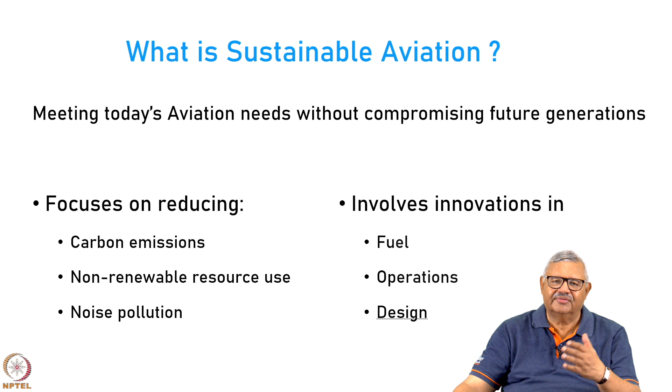Today we are going to look at sustainable aviation by design or usage of a new type of aircraft, and that is aircraft based on the principle of buoyancy.

So what is buoyancy engineering? Buoyancy engineering represents creative problem solving by exploiting buoyancy for lift generation. Traditionally, we generate lift by ensuring a minimum relative velocity between the flying object and the ambient air. But for that, you have to use a propulsive device to move this aircraft at a certain minimum speed. But what if we can use buoyancy as a mechanism to overcome gravity?

Then you do not have to fly at any speed, even at zero speed or stationary you will be able to get lift. So buoyancy engineering basically means application of Archimedes' principle, which acts on either a partially or fully submerged body. It says that the upward force acting on any body which is partially or fully submerged is equal to the weight of the fluid displaced, and it is also applicable for a fluid inside a fluid, not necessarily only a solid body in a fluid.

Now, there are many applications of buoyancy engineering. One of them is hot air balloons, where we enclose the envelope of the balloon with hot air generated by using some burners on the bottom, and hot air has a density lower than the ambient cold air, and therefore you start getting buoyancy.

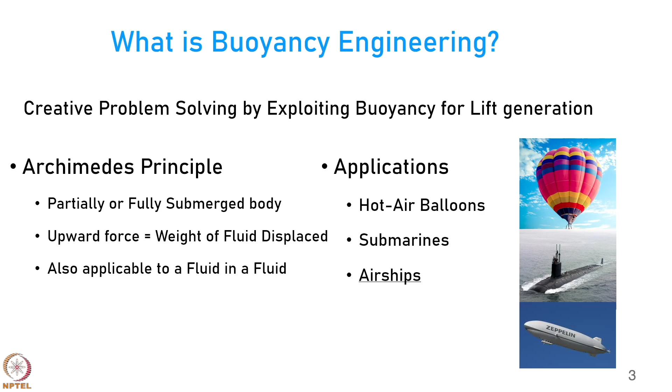Then you also have submarines which work on the principle of buoyancy to come up to the surface and to go down below the surface, so that they are less detectable. The third application of buoyancy engineering is airships, which are aircraft that are operating, and today we will talk about airships.

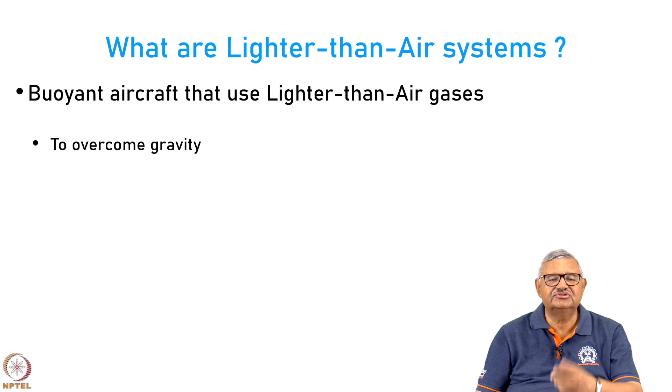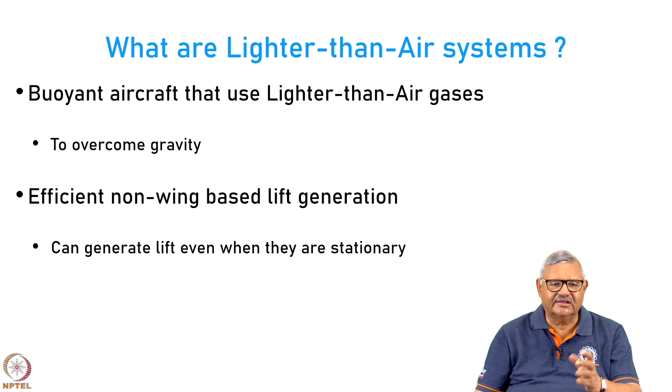Airships belong to a family of systems called lighter than air systems, or in short we call them LTA systems. So what are lighter than air systems? Basically these are buoyant aircraft or systems that use any lighter than air gas, or any gas whose density is less than that of air, and the purpose is to overcome gravity without the need for relative motion. These are very efficient non-wing based lift generation techniques because they can generate lift even when they are stationary. There are three most common types of LTA systems, and then there are many hybrids of these types: hot air balloons, aerostats and airships.

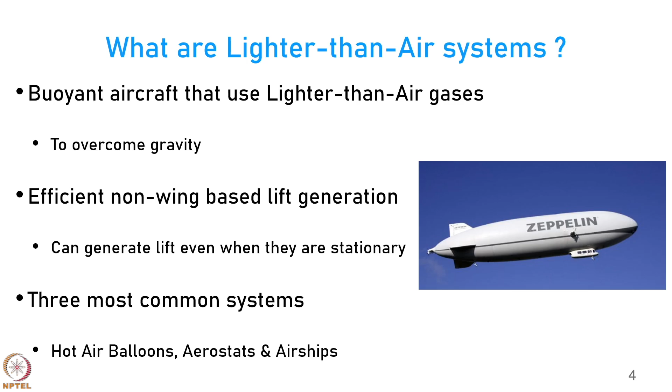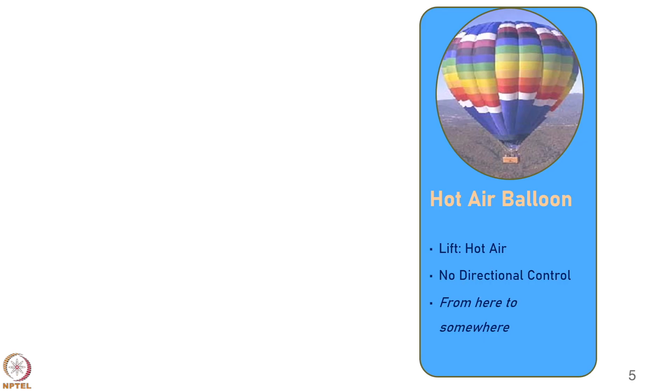Hot air balloons, as I mentioned, are platforms which take you from here to somewhere depending on the wind direction. They do not have any directional control. They just use hot air to generate lift and overcome gravity.

Aerostats are platforms again, but they are unpowered. They only have on their rear some stabilizing surfaces which allow them to not move too much with changes in wind direction, and they are unpowered, so they cannot go anywhere. They are connected with a cable to the ground and tethered.

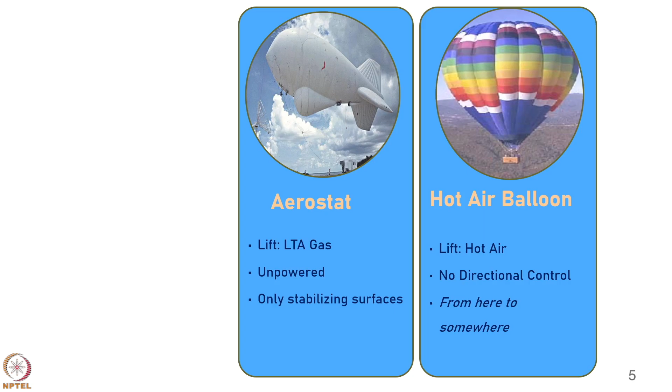Then you have airships, which are like an aircraft. They have 3-axis directional control. They are powered, and to some extent using the power of the power plant, they are able to overcome the winds and fly in the air.

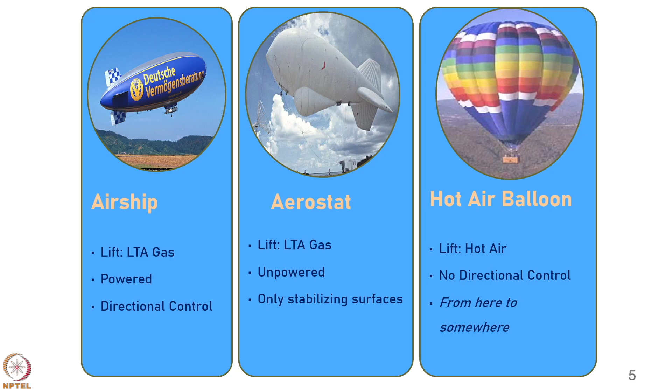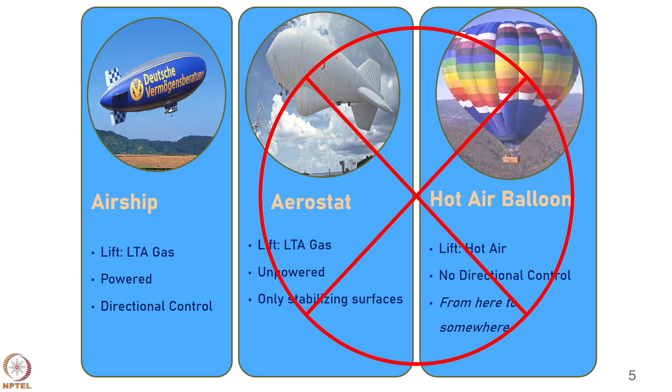Today we will not discuss aerostats and hot air balloons because they are not relevant to our discussion. They cannot be used for transportation from a desired location to another. Balloons go wherever the wind takes them, and aerostats cannot go anywhere. Airships can definitely travel from point A to point B to a large extent.

Now let us do a brief comparison between the two families of systems, the lighter than air on the left hand side and the heavier than air on the right hand side. Let us first look at the heavier than air system because they are very popular, people know about them.

They have two fundamentally good features: they are fast and they are less susceptible to weather changes. But there are also many negatives of heavier than air systems. Primarily they require a certain minimum relative speed to fly to generate lift, otherwise they will fall.

They are very much inefficient as far as fuel is concerned. The whole world is grappling with the consumption of fossil fuels to support current aviation, and they are complex. Anyone who has made an aircraft will realize these are not simple to make, they are very, very complex.

On the other hand, the lighter than air systems not only have dynamic lift when they move because of the relative motion between them and the ambient air, but when they are stationary they also generate lift because of buoyancy, called the aerostatic lift.

They are highly fuel efficient. The amount of fuel they consume is a fraction of what is consumed by a heavier than air system, and in general they are less complex to operate, but they have two main fundamental flaws. One is that they are slow, and the other is that they are very much susceptible to weather changes. Because of these two major drawbacks, the three positives are overcome and you do not see them very often.

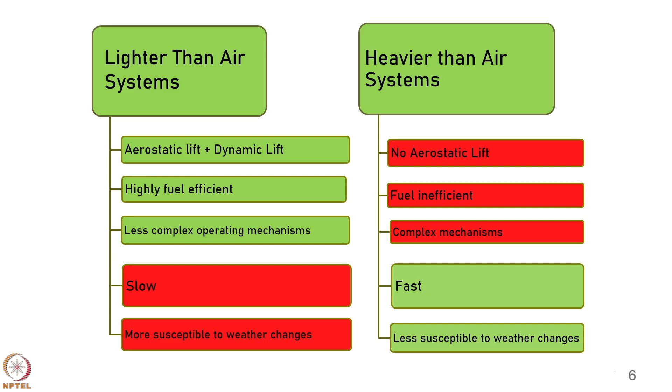They are not yet very popular, they are a niche area of application, but they are slowly emerging as alternatives to heavier than air systems for certain transportation requirements, and that is what we will study today.

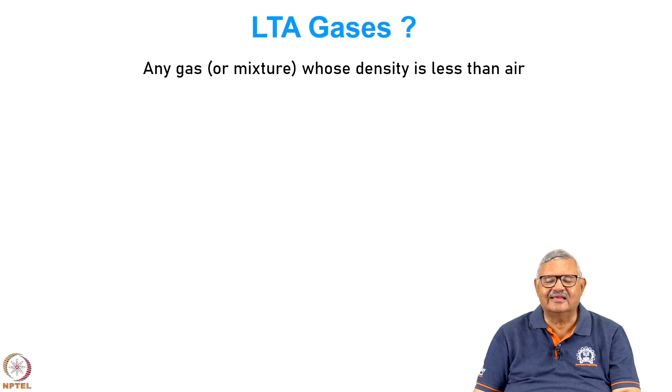Now, the LTA systems are based on LTA gases. So what are LTA gases? If I ask anybody, they will immediately say any gas or mixture of gases whose net density is less than that of the ambient air can be called an LTA gas.

The two principal gases everybody knows are hydrogen and helium, which under normal temperature and pressure conditions provide a lifting capacity of approximately 1.1 and 1 kg per cubic meter. This means if you take a balloon of hydrogen weighing, say, 135 grams, and put in it 1 cubic meter of hydrogen, because the self weight is 135 grams, the net lift you get will be 1 kilogram. Similarly, helium will give you slightly less lift, around 7% less compared to hydrogen.

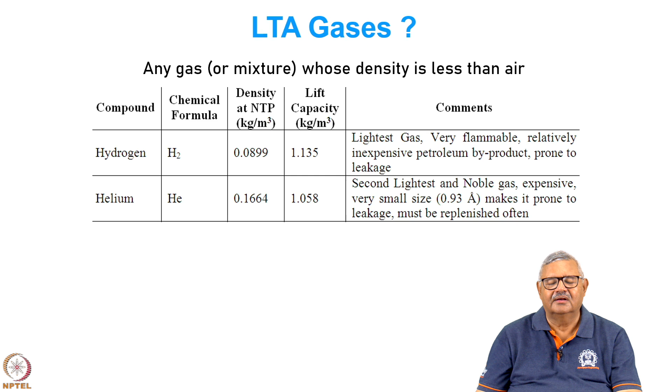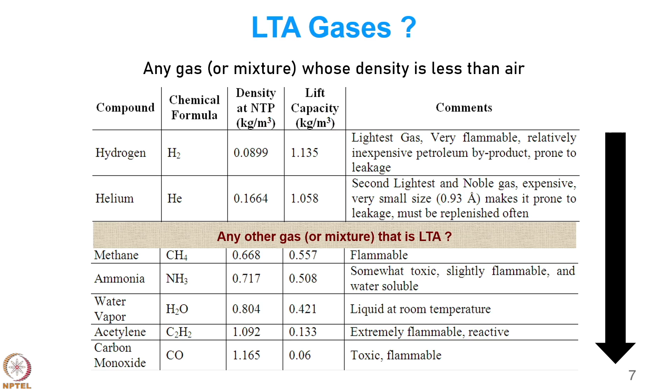However, there are many other gases also which are LTA: methane, ammonia, water vapor, acetylene, carbon monoxide—all of them are lighter than air. But the problem is the lifting capacity reduces drastically as you go down this list. The best is hydrogen with 1.135 kg per cubic meter, and the least capable in this list is carbon monoxide, which is only 0.06 kg per cubic meter, meaning you will get only 60 grams of lift per cubic meter of carbon monoxide. Therefore, it is practically of no great use to us.

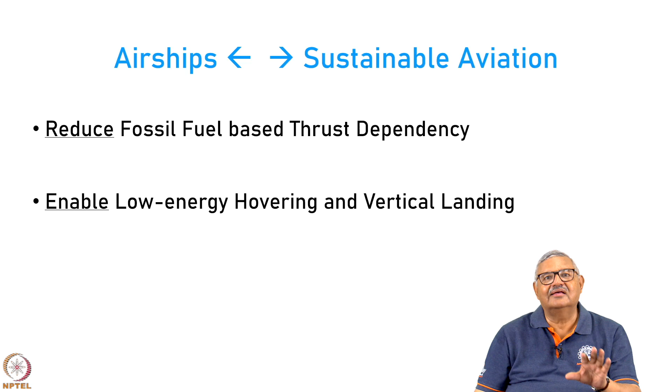Let us have a look at how airships can give you sustainable aviation. Airships reduce fossil fuel based thrust dependency by using buoyancy for generating the major part of their lift. They enable very low energy hovering and vertical landing, which is not possible with many heavier than air systems unless they consume large amounts of fuel, like helicopters or aircraft with vertical takeoff and landing, which can operate vertically and hover but consume massive amounts of fuel in that process.

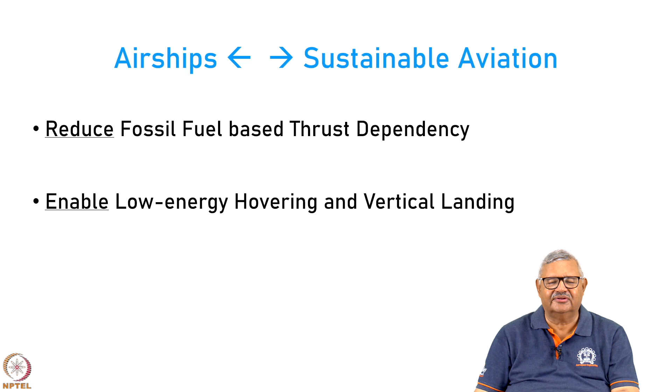Airships can do the same thing with much lower energy requirements, and they are quiet because their engines are smaller. Since fuel consumption is also much lower, they also have low emissions.

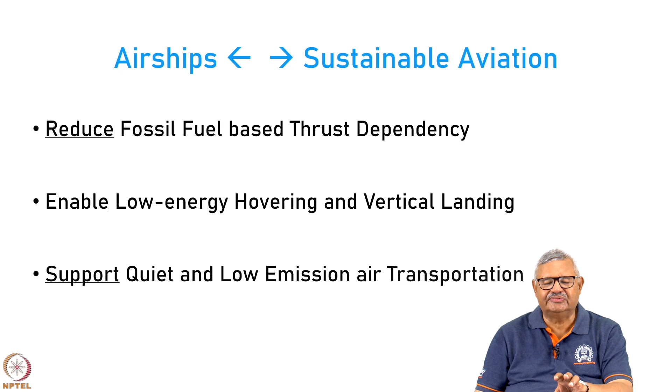Both on the emission front and on the noise front, airships score over aircraft, and therefore they are very powerful candidates for sustainable aviation.

As far as transportation of passengers, we are not looking at airships as a means for transporting passengers on a regular basis from A to B, because the dispatch reliability is very low, primarily because of the susceptibility to weather conditions and very large size and slow speed. But if you look at cargo transportation, it opens up a new opportunity.

Today cargo can be transported either by a ship or by a train or by a truck or by an airplane. These are the four ways of transporting cargo, especially over long distances, intercontinental distances or large distances.

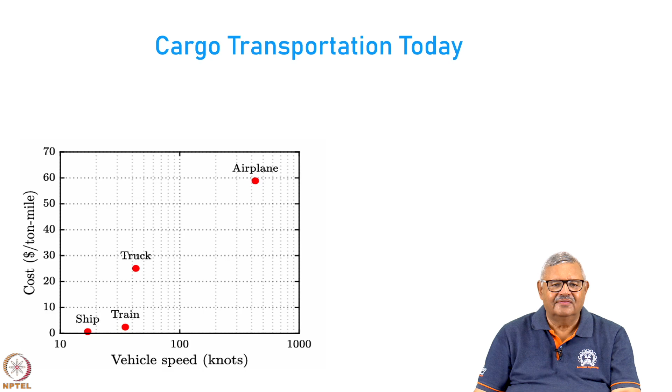This gap is where airships fit in. They push themselves into the gap that you can see here.

So let us say you would like to have more buoyant lift. One way is to increase the volume of the envelope of the airship. With increased volume, you also have a problem of increased weight because there will be more material used. So there is a limit to how much benefit you will get.

The other option is that you reduce the density of the gas or gas mixture inside. Now, if you use hydrogen, then you do not have any further scope of improvement with any naturally occurring gases, so you have reached the limit of the least dense gas. The other option is rho A, the density of the air outside, which can be increased if possible.

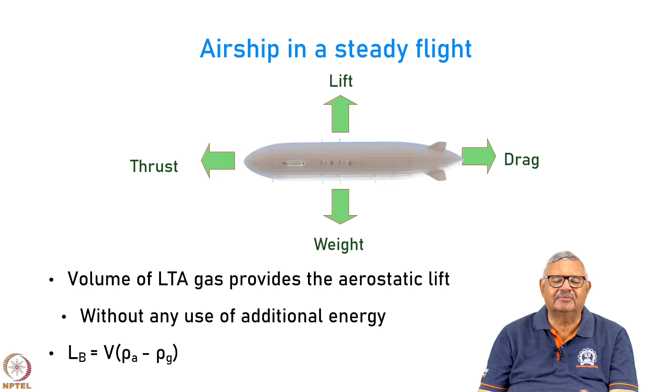How do you increase the value of rho A? One way is you fly at lower altitudes, because at lower altitudes the density of air is more than at high altitudes, and also fly in cold weather, because cold air is heavier than hot air. So if you fly at low altitudes in winter, you will get the maximum possible lift from a fixed volume and a fixed LTA gas.

So these are the only three things available to you to increase the buoyant lift of an LTA system.

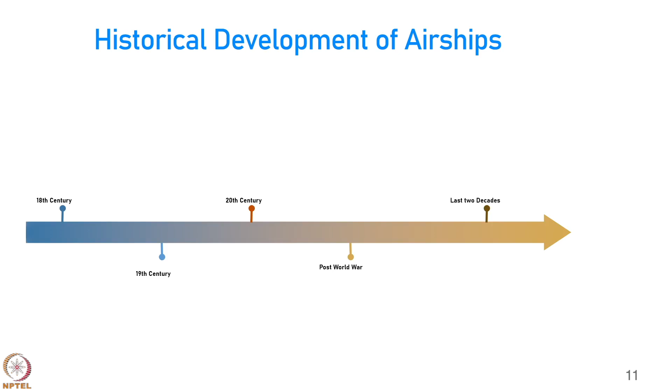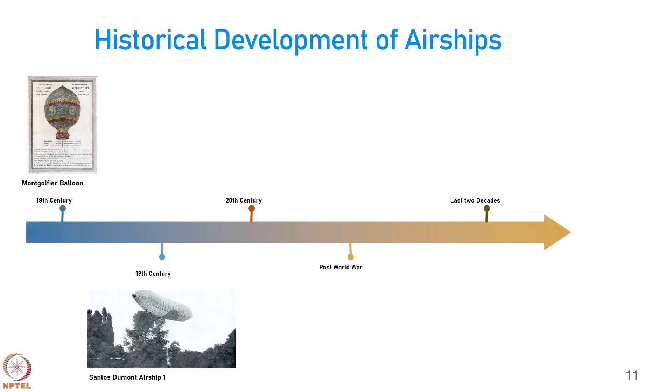Historically airships were ahead of aircraft. If we trace their development from the 18th century till the last two decades and the current times, you will notice that several years before the Wright brothers, the Montgolfier balloon established that LTA systems can be used. In the 19th century, when the Wright brothers were struggling to make their aircraft really operational, there were people like Santos Dumont from Brazil who were flying airships regularly.

Then during the 20th century, there was a huge amount of development in the airship technology, but aircraft technology was slowly catching up. Then because of a series of accidents that took place in the late 30s, early 40s, the airship technology was into hibernation till it was revived in the post-war period by some interesting projects, and the outcome of that project eventually was a blimp.

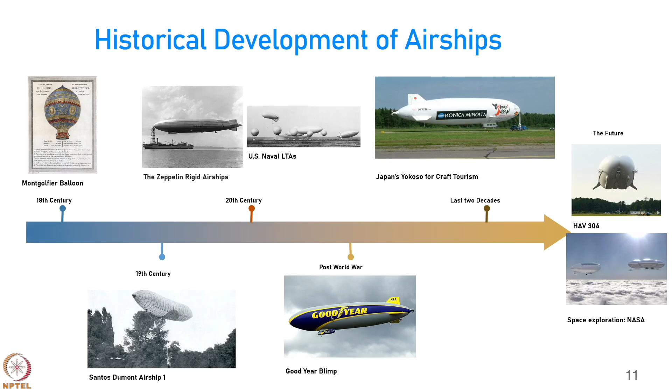In the last 2 decades there have been lots of developments, and recently there have been attempts to use airships for exploration of other planets like Venus. There are proposals to look at hybrid airships, which have some additional interesting features. So the whole landscape has now emerged. After about mid-80s to 90s, interest in airships is being revived, and in the last 10 years there has been tremendous interest, as we will see.

Like an aircraft, an airship has similar components. There is a gondola where you put all the payload and the items. In this case, we also put the propulsion system on the gondola. You have this large envelope in which you put the LTA gas, and then you have control surfaces.

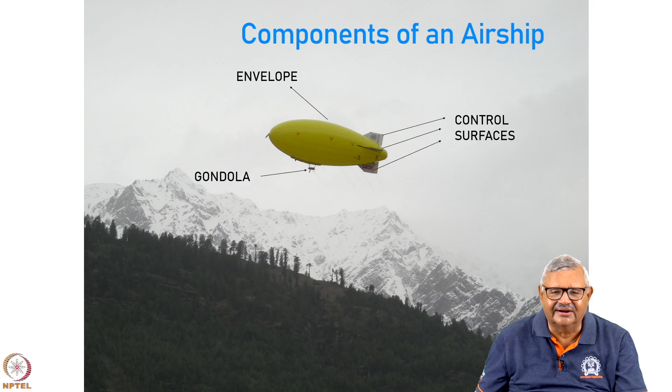The main difference, as you can observe, is that the gondola, which is equivalent to the fuselage of an aircraft, is much smaller in dimension compared to the lift producing device, which is the wing in the aircraft and the envelope in the airship. Also notice that you have more area of control surfaces in airships compared to aircraft. For example, aircraft normally have only one vertical fin, but here you can normally see 2 vertical fins. That is because airships fly at low speeds, so they need large areas to provide the yawing moment to balance out the instability in yaw.

There are 4 types of airships based on the structure used to construct them. On the top left is the rigid airship, which was used in the past and is coming back in a big way today in the future of large size cargo airships. On the bottom you have a non-rigid airship which has got no internal structure.

It only has an envelope which maintains its shape by internal overpressure. Then you have a compromise solution called semi-rigid, where there is an internal rigid structure like you have in the aircraft - these frames and longerons - but the envelope is flexible. That is called semi-rigid.

One of the most successful airships flying today is Zeppelin NT, which is a semi-rigid construction. The bottom right is a hot air balloon which is masquerading as an airship. It is a hot air balloon in the shape of an airship, but it can't be used for any serious work except promoting products like KitKat or flying around for personal adventure. It cannot really be used for anything very serious or for transportation purposes.

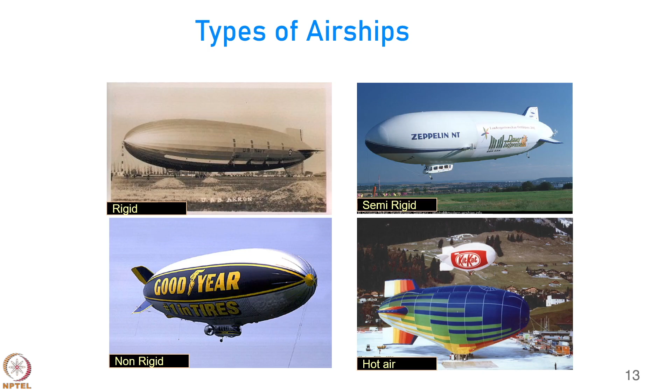Now, what is the unique selling proposition or USP of airships? Why are we talking about them? First of all, they are able to operate from open fields. They do not require a dedicated runway or an airport. So that makes them available to operate from remote areas.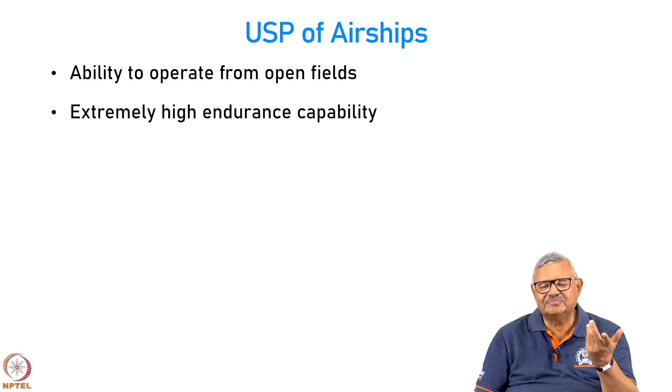They have extremely high endurance capability compared to aircraft, because they use much lesser fuel. Whereas an aircraft can fly up to a maximum of 18-20 hours non-stop without refueling, airships can fly for much longer. 50 hours has been recorded, 52 hours has been recorded quite routinely on airships.

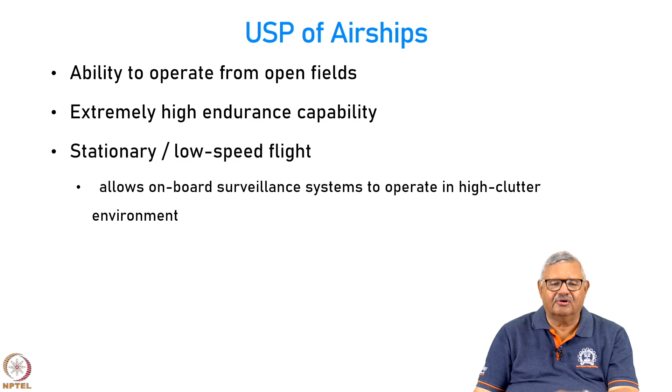Airships allow stationary and low speed flight, and because of that you can have onboard surveillance systems to operate in high clutter environments. They will also give you large cabin space and low vibrations, which reduces crew fatigue as compared to aircraft.

The large cabin space is available because you already have a large envelope, so you can put a large cabin below it. This is a vehicle that gives you low noise, low environmental pollution, and it can be made unobtrusive by camouflaging it with the background.

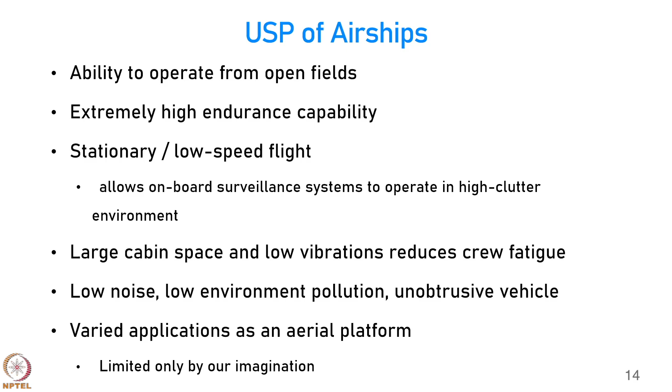There are many applications of airships as an aerial platform, and we always say that the applications of airships are limited by your imagination. There are many uses. Let us have a look at some current applications of airships.

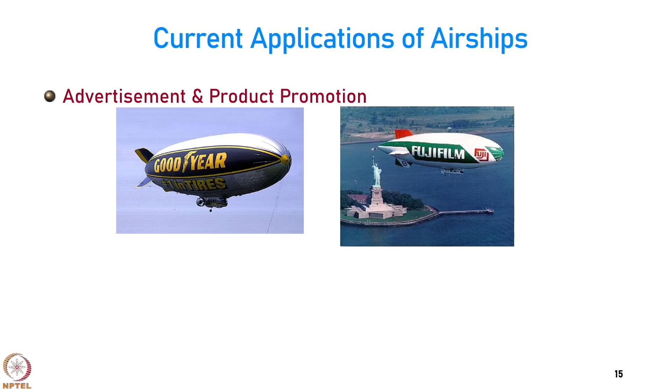The most common application of airships in the world today is for these two activities: product promotion and advertisement. Then there are obvious applications in aerial observation and surveillance. Many applications, especially the Zeppelin NT airship of Germany, are used for tourism and corporate hospitality.

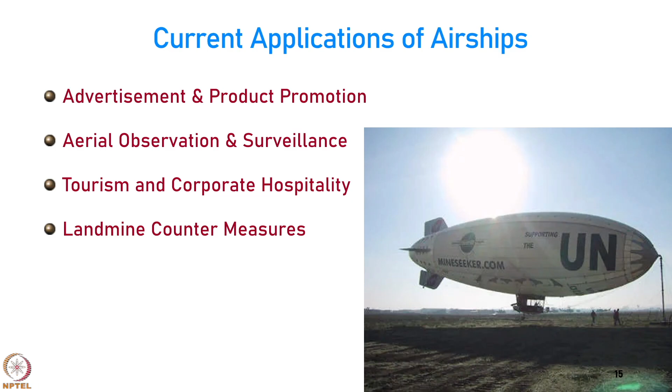Then there are some very innovative applications, such as the use of airships for removing landmines - an airship funded by the UN called the Mine Seeker. I would encourage you to go and search the website mineseeker.com to have a look at what was done to take care of the landmines left after the Kosovo conflict. There is also a recorded application of airships for several law enforcement purposes, such as during the Olympics in Athens and the Olympics in Atlanta.

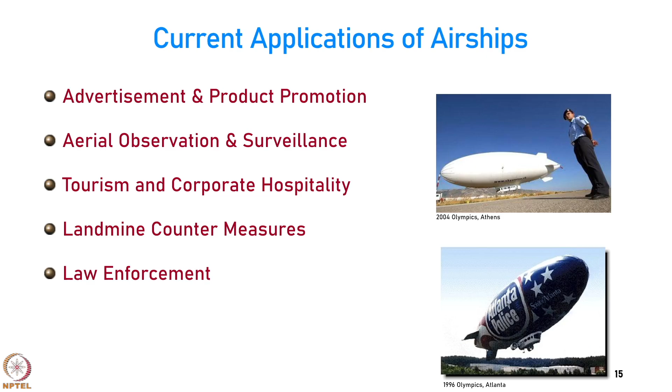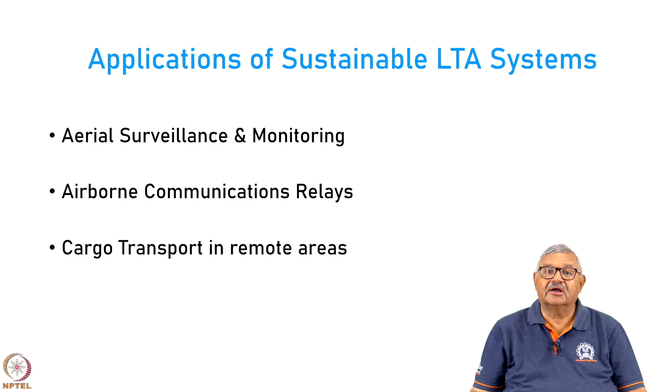Now we will look at sustainable LTA systems and how they can be applied. We can use them for surveillance and monitoring, as airborne communications relay to provide communication links in areas which are not connected, for cargo transport in remote areas (the principal application for sustainable aviation in the future), and also for tourism and short haul passenger travel.

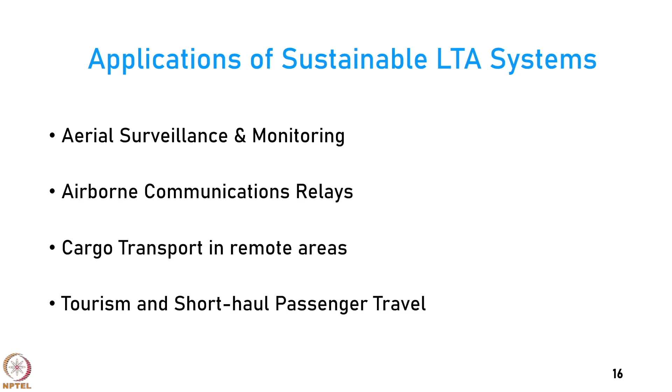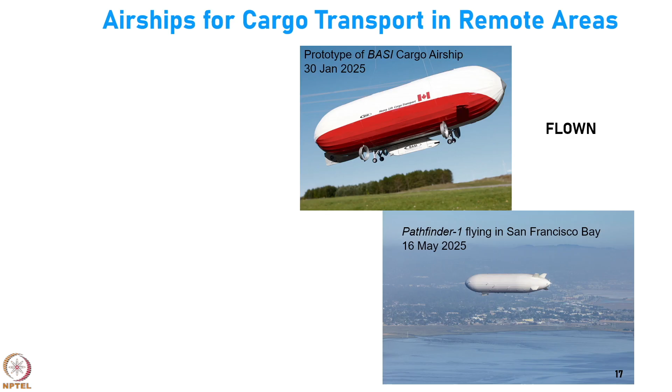If you look at airships for cargo transport in remote areas, these are two prototypes which have successfully flown: the Basi cargo airship prototype, flown in Canada, and the Pathfinder 1, flown in San Francisco Bay. Both of these are only working prototypes.

Then there are certain concepts under development, such as the Flying Whales shown at the bottom, and the Atlant concept of Atlas LTA shown at the top left. These are under development and we will hopefully see them flying very soon.

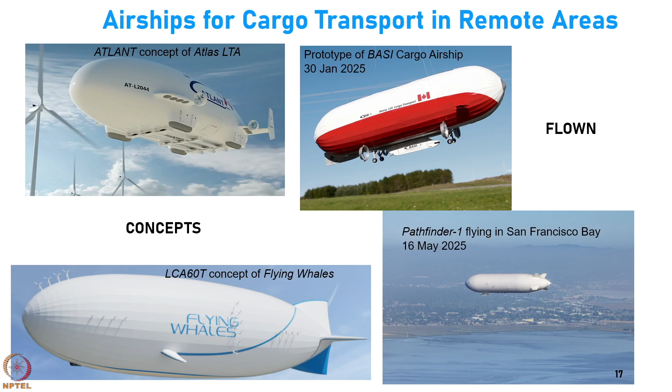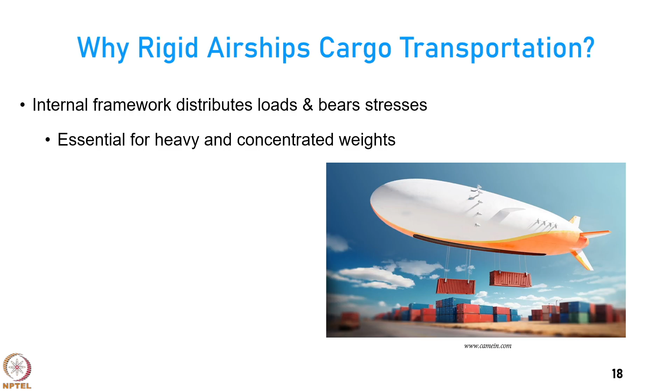When we look at cargo transportation, large volumes of cargo transportation, rigid airships become a very promising category. Why rigid airships? Because they have the internal framework to distribute loads and bear the stresses which are inevitable when you transport large, heavy, concentrated weight of cargo, such as shown in this image.

Rigid airships also have better resistance to the weather, which is a problem that many semi-rigid and non-rigid airships face. And if you have to transport cargo over long distances, you will need better weather resistance.

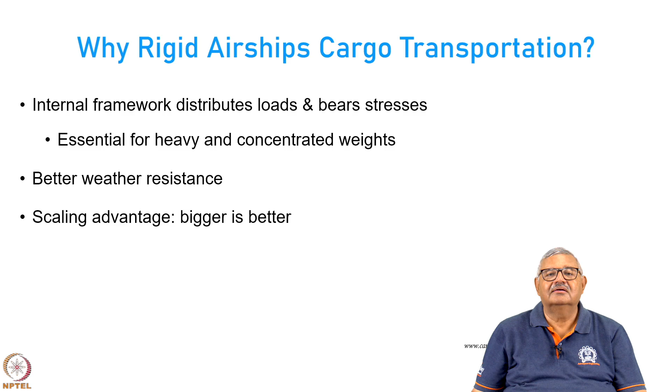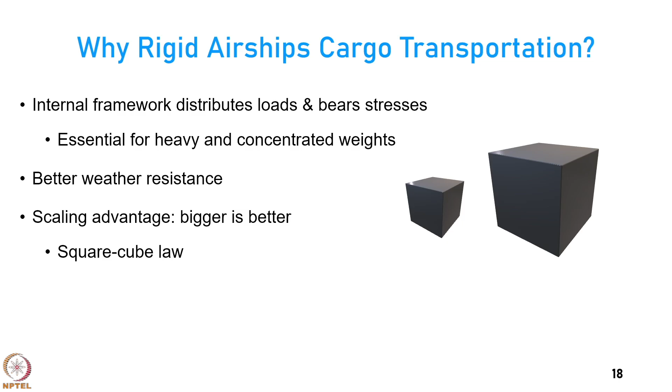They also have a scaling advantage. Using the square cube law, the moment you make them larger, they become much more productive and efficient. As we know, when you increase the linear dimension, the area goes up by square but the volume goes up by cube. The lift from a buoyant system is proportional to L cube, whereas the weight of the system is proportional to L square. So there is a straightaway advantage in scaling the airship—the lift to weight ratio increases when you make airships larger.

So when you want to transport huge cargo containers, larger airships are definitely much better. Also, the rigid airship will have lesser gas leakage, because the gas bags will be inside a solid structure, not exposed to the vagaries of the outside world. Plus, because of the rigid structure, you will have higher redundancy—the structure can bear more, and is much more efficient and redundant.

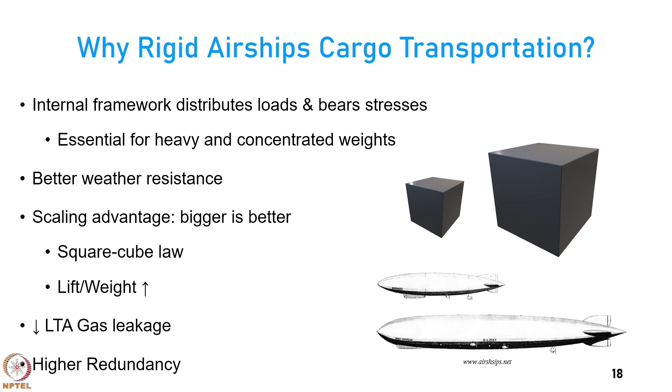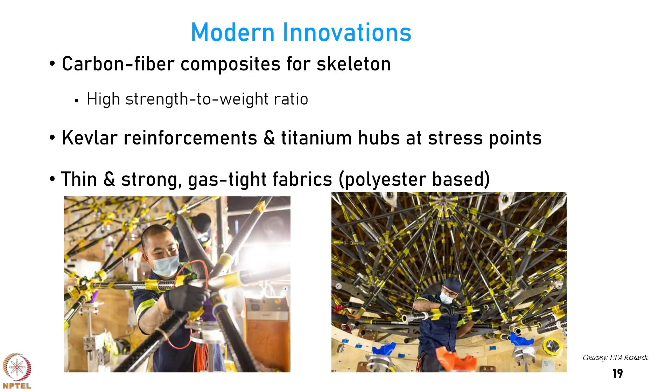Modern innovations have made rigid cargo airships also a very promising candidate, such as the use of carbon fiber composites for the skeleton, which gives high strength to weight ratio, using Kevlar reinforcement and titanium hubs at points which are supposed to be highly stressed. There is also a huge amount of research in developing specific materials for gas tight fabrics which are lightweight and also capable.

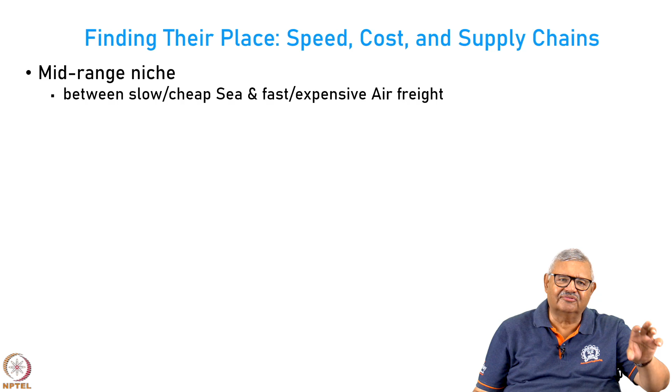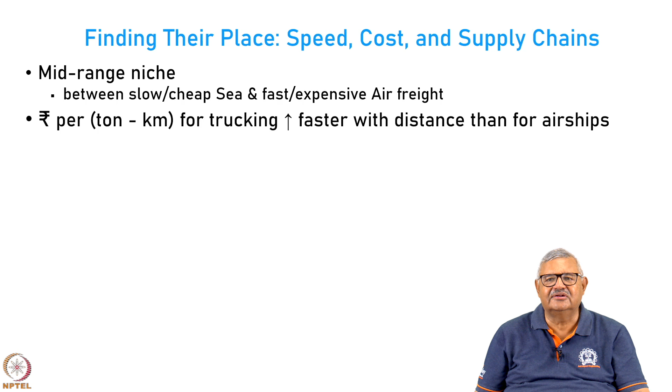The cost in rupees per ton kilometer for trucking increases much faster with distance than for airships, and airships have lower dependence on infrastructure as compared to other modes.

If we compare roughly the parameters related to transportation of cargo over long distances—by shipping, by rail, by truck, by airship and aircraft—you can notice that shipping is the least expensive, ranging from 0.85 to 2.5 rupees per ton kilometer. These numbers were taken from studies in the literature by various agencies, so it is not that these have already been tried out, these are all predictions. Rail transportation entails around 3.5 to 7 rupees per ton kilometer.

Truck is more expensive than rail, with airships in between that and aircraft. The speed of airships can be of the order of 80 to 150 kilometers per hour, which is 10 times lower than that of the aircraft, but of the order of or slightly better than that of the truck. Remember, we are doing point to point transport in airships, so you do not need to follow the road, especially in hilly areas where roads can be highly curved.

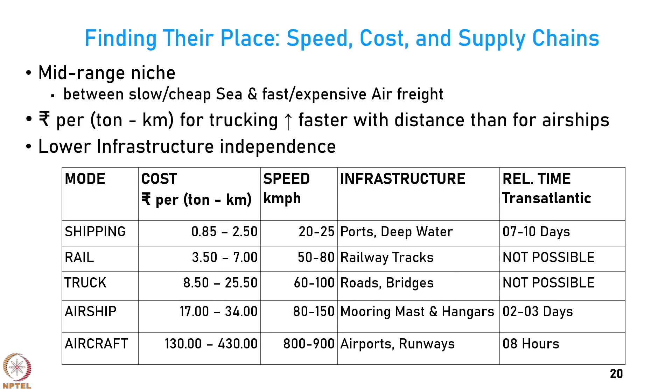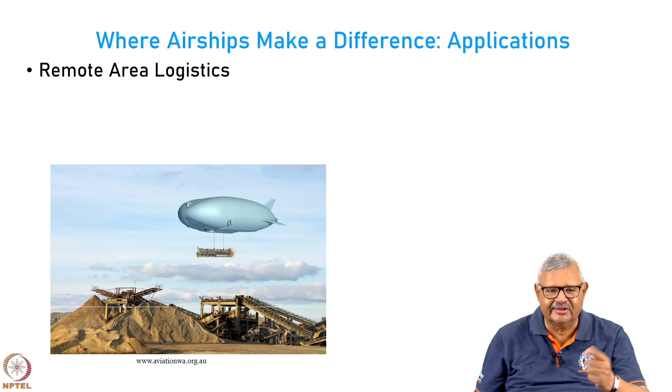If you look at the comparison, you find that there is a niche between the truck and the aircraft that airships can accommodate. Now, where are airships making a difference? What applications? Remote area logistics, areas where we do not have runways, airports, rail tracks, or roads. These remote areas where we want to build infrastructure and provide logistic support, that is where airships can be used. Logistics required by the military, which work in newer areas.

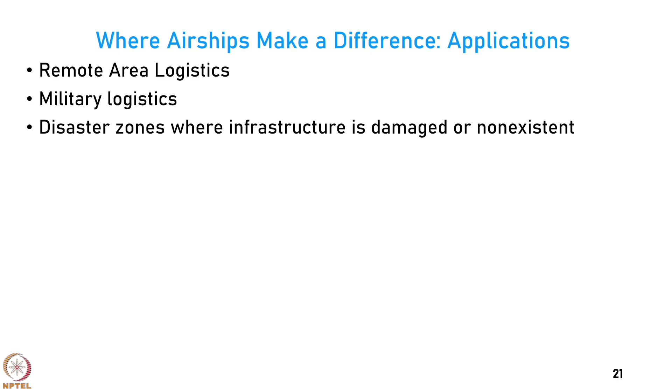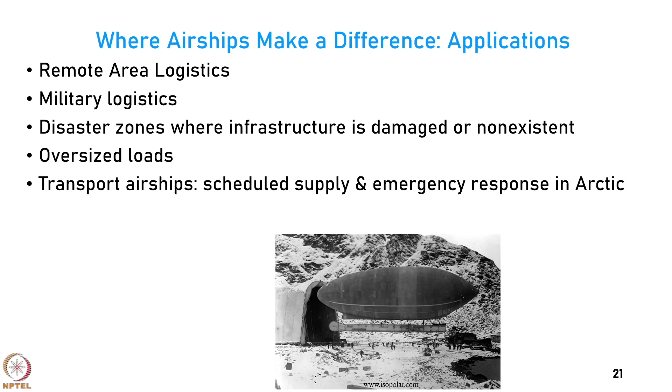Some post-disaster areas where you need to provide support to relieve. If you want to carry oversized loads such as large blades of wind turbines to remote areas, or transport supplies and equipment in very cold and inaccessible areas where you do not have roads, then using airships one will have greener skies and provide a sustainable transportation system.

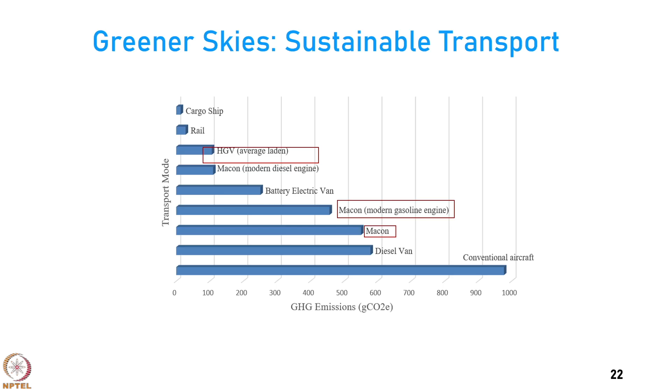Here is a comparison of the greenhouse gas emissions with various transport modes. Cargo and rail have a very low value, but heavy goods vehicles and vans have a higher value. Some studies were done by us to find out if we use conventional or existing old airships, like there is a very prominent airship called Macon, whose data is available. It was used many years ago in the early 30s in the US. Suppose we take the value of Macon of that time, it is compared to a diesel van.

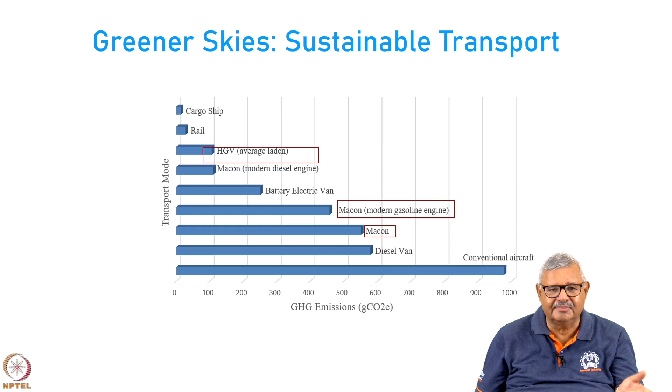But if you use a modern gasoline engine, it reduces. If you change to modern diesel engines, it becomes much better, and if you use electrical engines, it can be further improved. So, if an aircraft generates about 1647 grams CO2 equivalent per ton kilometer, airships can give only about 13, and if you use electrical airships it can be only 4. You can see the tremendous improvement, about 400 times lower emissions as compared to an aircraft.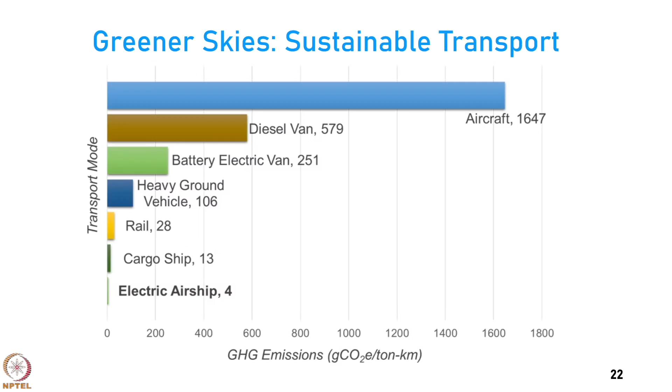Now, there are many modern giants under development. Let us quickly look at some of these promising configurations which are under study. The first that comes to mind is the Pathfinder 1, which recently had a successful flight, and they are planning to develop the airship as a 14-seat passenger aircraft plus 28 tons of cargo.

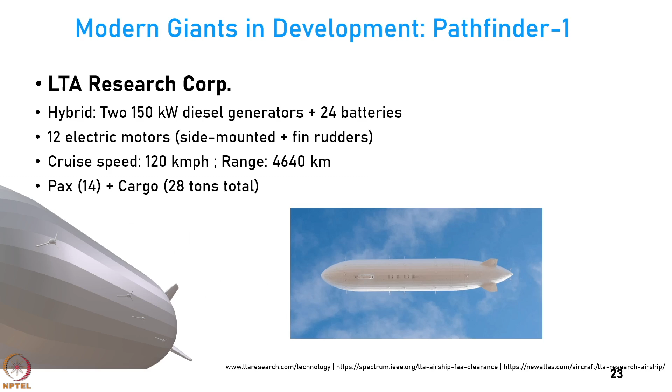Then there is a company that deals with supply of hydrogen to remote areas. They have proposed a concept called H2 Clipper, which will only be used to transport the gas. It can carry about 150 tons as per their expectations over around 10,000 kilometers, equivalent to 35 shipping containers in one load. Very promising.

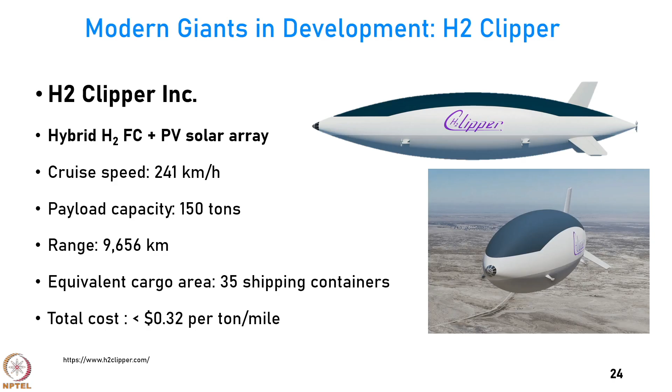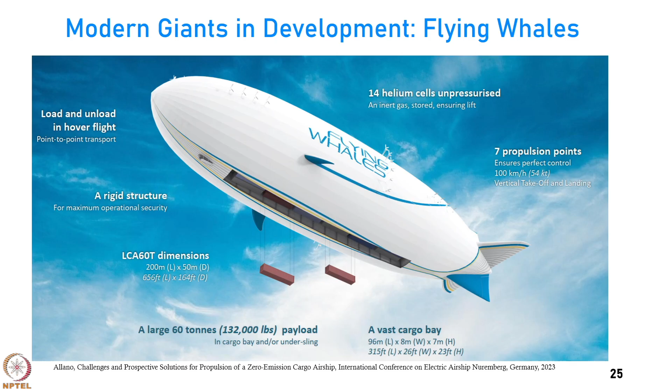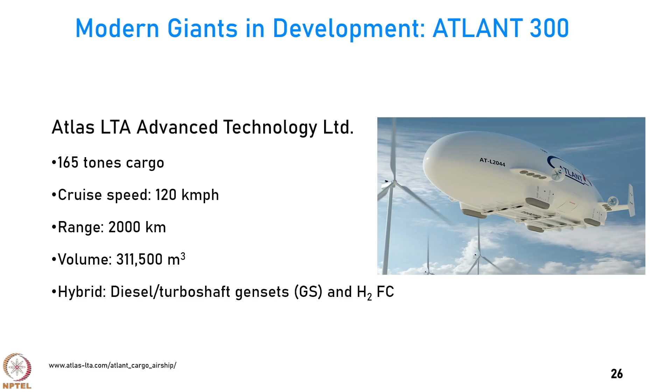Then you have Flying Whales, a company in France which looks at transportation of 60 tons of cargo, maybe larger ones in the future. They are coming up with the design of a rigid cargo airship. Atlant 300, about whom I spoke, is another airship under development with multiple engines and configurations. They are aiming to carry 165 tons to a 2000 kilometer range, a very large vehicle with 311,000 cubic meters. Russia is also developing concepts of lenticular airships for transporting huge amounts of cargo in remote areas at high speeds over long distances.

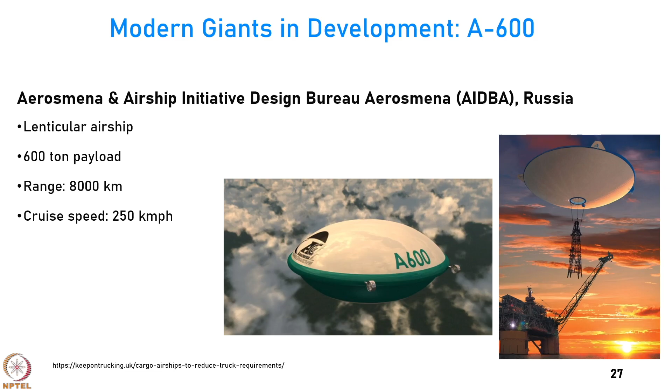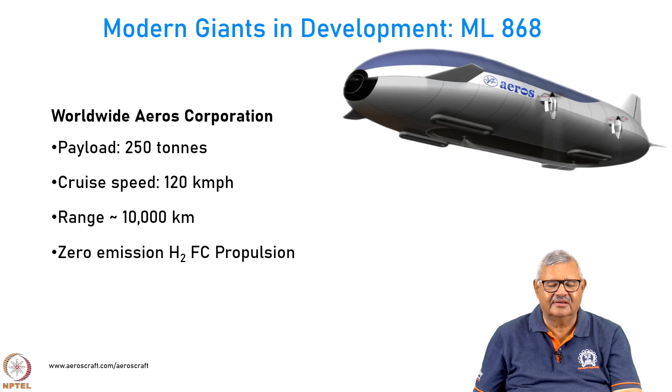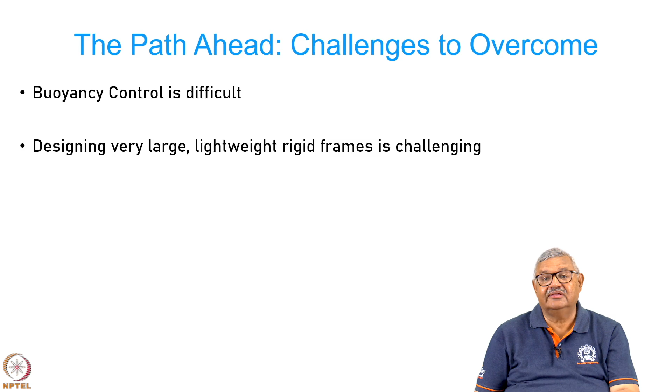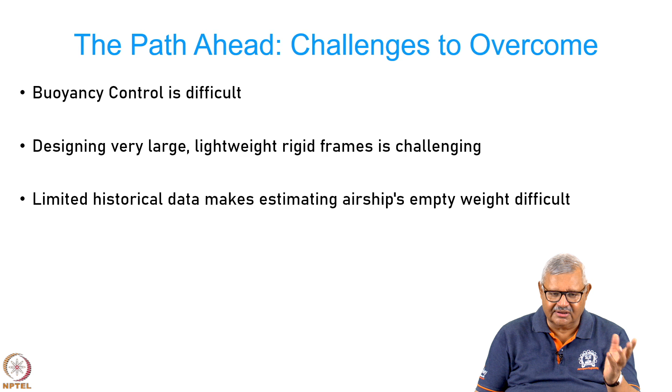The path ahead is full of challenges to be overcome. Buoyancy control is not easy, especially when there are large changes in weight. Designing a structure which is very lightweight but very rigid is also a very challenging problem. Airships are new in the sense that their knowledge base has been lost over the years. We do not have data about historical airships to that extent, and today the information is not so easily available, so estimating their total empty weight also becomes very difficult.

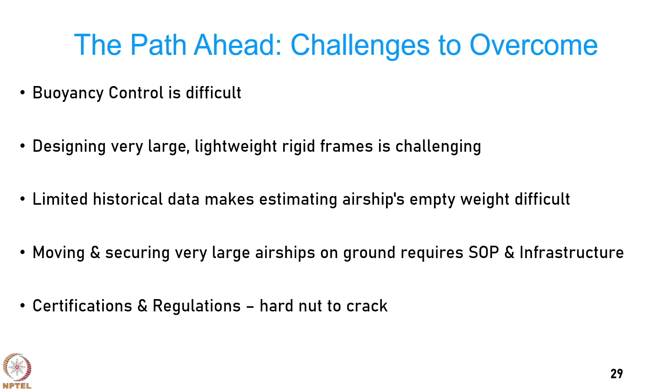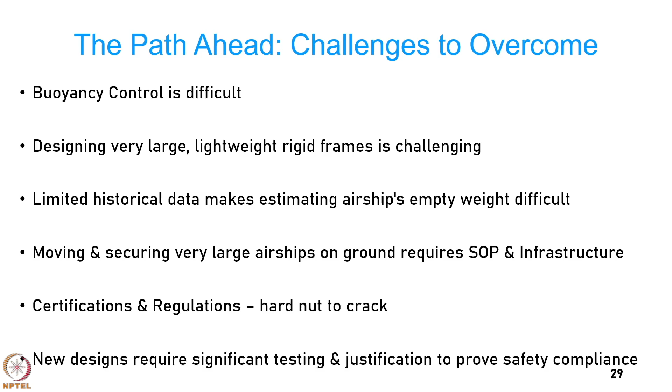Moving and securing very large airships from the ground will require infrastructure on the ground, and development of tried and tested operating procedures. Then one hard nut to crack is certification and regulations, because this technology is not really very prominently available. So, there are large amounts of doubts and questions regarding its viability, and the new designs being proposed do not happen overnight. They require a lot of testing and justification so that they can be proved to be compliant from a safety standpoint.

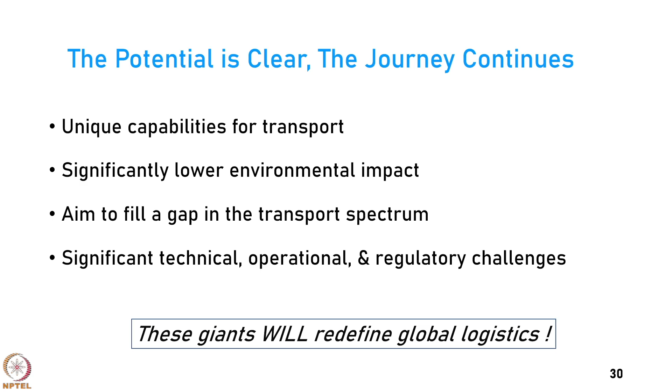But despite these challenges, it is very clear that airships do offer some unique capabilities for transportation, especially large volumes and weights of cargo. They have the advantage of significantly lower environmental impact because of much lesser fuel consumption. They aim to fill a gap between trucks and aircraft in the transportation spectrum, but with all that, the bottom line is that if we are able to overcome the significant technical, operational and regulatory challenges, then these giants will definitely redefine the way we conduct global logistics.